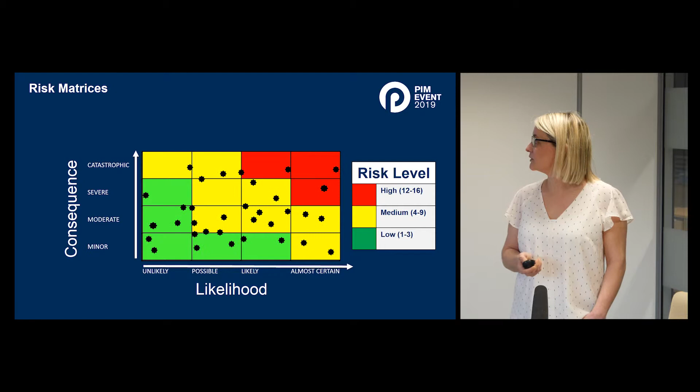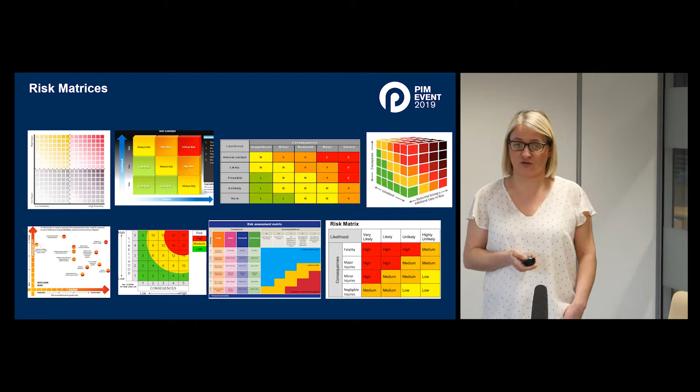We're all familiar with risk matrices. They come in various different sizes, shapes, scales. We all use them every day. We probably have one up on the wall or on the desk in front of us. And probably because we use them so frequently and they are so embedded within our organisation's risk management procedures, we maybe don't take the time really to think about their limitations.

So there's quite a lot of criticism for risk matrices out there. I put a few up on the screen behind me. I'm not going to talk about all of these today, but I would like to talk about a few. So the first limitation that I'd like to talk about is understanding scales and our ability to understand those scales. So within the context of integrity management, we use matrices frequently in methodologies such as risk-based inspection or anomaly management.

And we often have a scale of consequence from minor to catastrophic. This is plotted in an ordinal scale from 1 to 4, and it usually comes with some semi-quantitative consequence description, so minor being an economic loss of less than 2.5 million, or catastrophic over 250 million.

So to sort of understand this and put it in context, if we were to compare a minor consequence of failure, less than 2.5 million, to a catastrophic consequence of failure over 250 million, we need to be aware that a catastrophic loss isn't 4 times a minor loss, it's actually 100 times a minor loss.

So when we look at a risk matrix, as we move along the risk matrix from left to right, the range within each cell gets higher. So for example, a risk score of 9 could be any economic loss value from 25 to 250 million. However, if we were to look at a risk score of 3, it could be anything from 0 to 2.5. So the boxes are not equal, and we can't really get away from this by putting in more boxes.

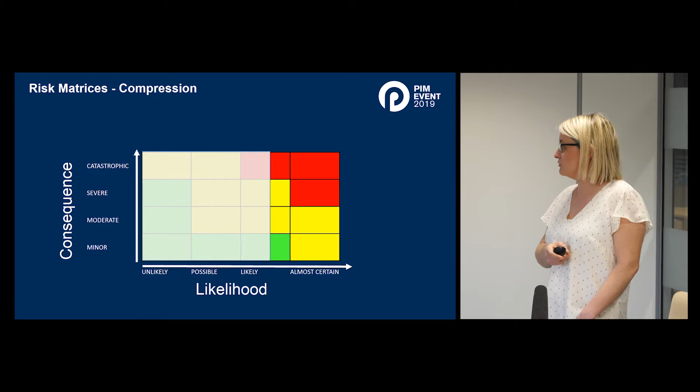And to give a good example of that, if we were to look at anomaly management, so with anomalies, we're now not talking about uncertainty or risk. These are known defects, and they will fail at some point in the future. So knowing this, you've already taken out the unlikely or the possible descriptions from your matrix, and you've pushed all your anomalies over to the right-hand side. And when you compress the matrix in this way, you lose your ability to prioritise the risks.

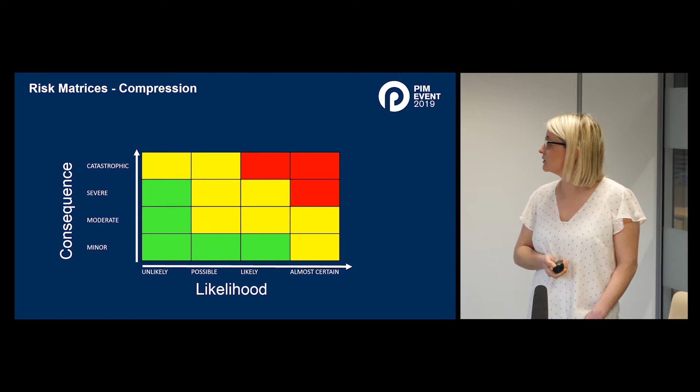But this is something we know, and this is a quote from one of the ISO standards, and it says that a matrix should be designed to be appropriate for the circumstance, so it may be difficult to have a common system applying across a range of circumstances relevant to an organisation.

One of the other limitations when it comes to risk matrices is something called layering. This is when we try to adopt a common framework, but in order to make it fit our methodologies, we add some layer to the likelihood descriptions. So in this example, if we look at risk-based inspection, here we're trying to predict when pressure-containing equipment will fail in the future. And one way we can do that is by doing remaining life calculations. And so we can add another layer on the likelihood description to put some sort of time to failure.

So for example, in this risk matrix, we could say that equipment unlikely to fail has a remaining life greater than the design life, or equipment that will almost certainly fail has a remaining life that is less than a third of the design life. So that allows us to spread our risk across the matrix, but we need to be aware that when we do this, not everyone outside our own department knows that that's what this means.

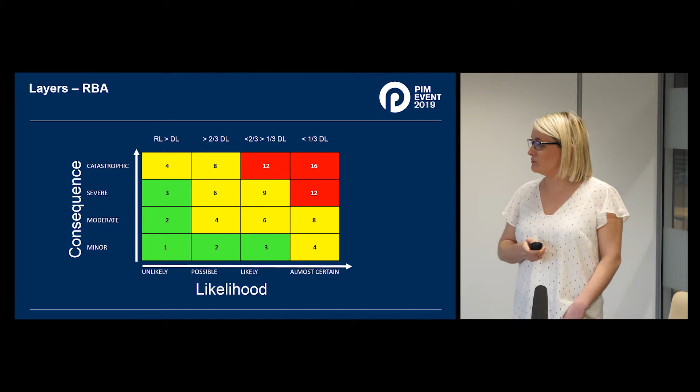So if we're using one common framework, and people outside the integrity department look and see a risk 12, we're not saying that that's an immediate danger of failing. What we're saying is that in our risk-based inspection methodology, it's priority for inspection because it's coming towards the end of its useful life.

Another example would be anomalies. So one of the layers that we might put on anomaly assessment might be, again, some time to failure. So if we identify a defect and we assess that to be less than 1 year to failure, we could say it's almost certain. Or if we assess it to be more than 5 years to failure, we could say it's unlikely. But again, we need to be careful about this limitation.

If we look at two risk scores of 8, both moderate level risk, and could be considered the same priority, what we need to be aware of here is do we remediate the moderate almost certain risk that has less than a year to failure, or do you remediate the possible but catastrophic anomaly that you may have 2 to 5 years to deal with? So we need to make sure that we're not skewing our own organisation's risk acceptance levels when we add layers to our matrix in our organisation's risk assessment methodologies.

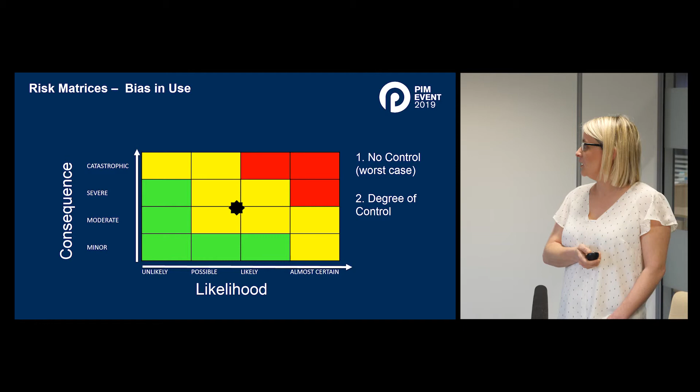Some people will assume that there's some degree of control, whether they believe that control will be effective or not. And others will go absolute best case, there's full control, nothing could ever possibly go wrong. So we need to be aware of that when asking people within our organisation to use the same matrix.

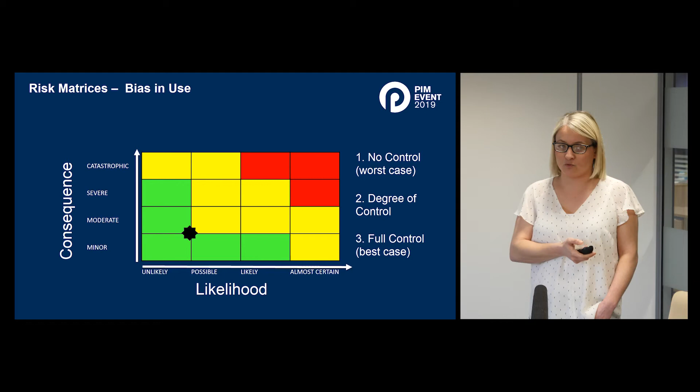There was a more recent study done in 2013, and this gave people the same risk event and asked them to rank it on a 4x4 matrix. And what the study shows is that, yes, you've got your people who are very risk tolerant and scored in the low level risk region, and yes, you've got your people who are very risk averse and scored in the high risk region. However, the majority of people kind of went somewhere in the middle.

And what they concluded from the study was that when people didn't have enough information to be confident in their ability to score a certain risk event, they almost always went for medium consequence, medium likelihood. They played safe, if you like, and they all score in the middle, and the risk scores bunch in your matrix.

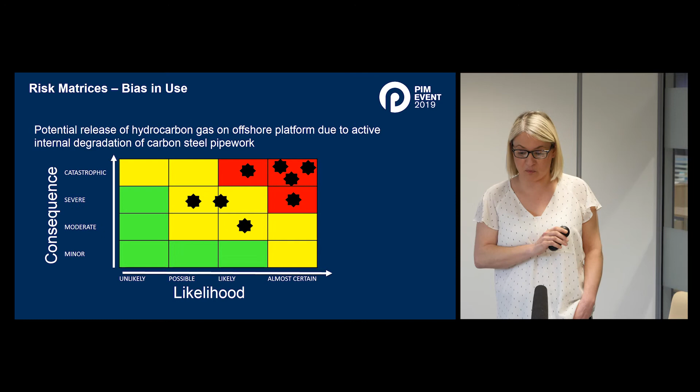So I thought this was interesting, and I thought I'd try it for myself, so I emailed out a number of my colleagues, and I gave them a risk event, and I asked them to score it on a 4x4 matrix. And the event that I gave them was the release of hydrocarbon gas on an offshore platform due to degradation of pipework. A lot of them came back and asked for more information, but I deliberately said, I want you to score it based on that sentence only. And here were the results.

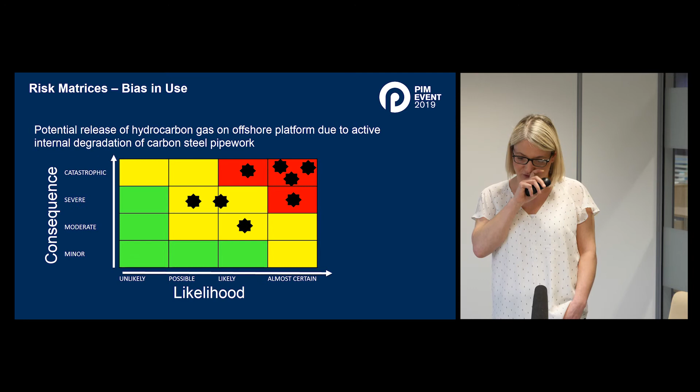So the majority of people scored in the high risk region, and a few people scored in that moderate level of risk region. And what I thought was interesting about this was that everyone who's in that top right-hand box were people with less than 5 years experience in the industry, and everyone who's in that yellow middle region, moderate risk, were people with over 10 years experience in the industry.

I then went back and gave them more information, and this time I gave them additional detail on the type of process fluids, the remaining life, the specific failure mode, the location of the pipework. So more information that they could use to more confidently make a decision. And what happened was that regardless of people's experience, everyone then ranked in the same risk level, this moderate region of risk.

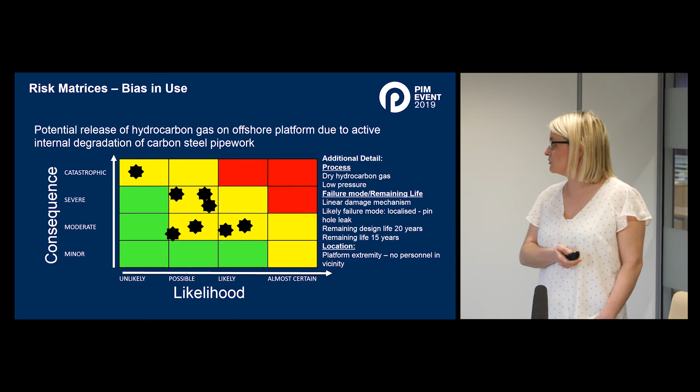So we're never going to get away from bias in the use of risk matrices. However, there are probably a few things that we can do to reduce the subjectivity. So if we give people better understanding of our own cognitive biases and how we use the matrices, if we can give people access to the correct quality of data, if we can make sure that everyone is ranking the same credible risk event, and any assumptions that we made when doing the assessment are made clear, then we should get more consistency when using the risk matrix.

And that brings us on to the next point, which is information, data quality and availability. A lot of the research suggests that if you increase the quality of your data, if you arm people with the right information, then you can actually reduce the subjectivity when carrying out risk assessments.

So those are some of the limitations, but what's right about the matrix? They're simple to use and understand, they're easy to construct, they're a very good screening tool, they can allow you to prioritise larger volumes of risk, they give a very good visual representation of risk, they promote really good discussion around risk management, they are a common language if we are all aware of their limitations, and they're really invaluable for aiding informed decision making.

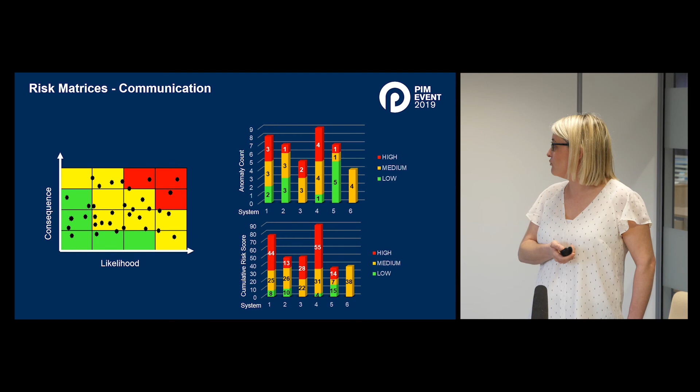They're also a really good way of graphically presenting the results of any risk assessment on many different items of equipment. To give an example, if you were to plot anomaly data on a risk matrix, you can then extrapolate that data and show it in different graphical forms. This example shows anomaly counts by system, so you can quite easily see which systems carry the highest amount of risk, or alternatively, cumulative risk score by system, so you immediately see that system 4 is carrying the highest level of risk.

So the point that I want people to take away is that the risk matrix is a tool which can be used to support risk-informed decisions, but ultimately they're not a tool for making decisions. If we go back to a risk management process, yes, matrices do have their limitations, and they may only be a rough approximation tool for risk analysis, but they are invaluable for distinguishing between the most urgent and the least urgent risks in the majority of cases. So if we can use them effectively as a prioritisation tool, then ultimately we can make the right decisions on how to best manage risk.